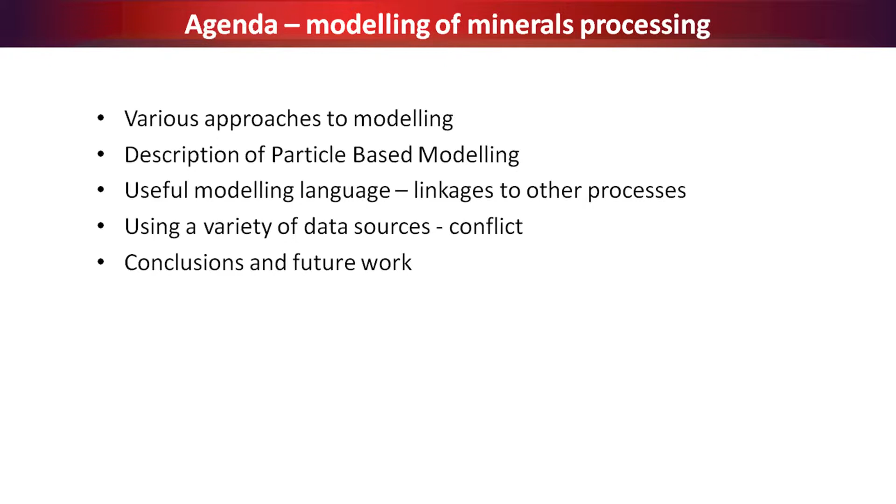People have looked at this from various ways over many years. So I'll start off with what are some of the typical approaches people have used to model fines processes. Then I'm going to introduce particle-based modeling, which is the way I've been looking at it, and show you why it's useful. Then we come to point number 4, conflict. Once you start going down the line of particle-based modeling, you hit all sorts of conflicts, and how do you resolve those?

So two questions: what modeling approach is sensible, what modeling approach should you use, and for today, why do I choose spirals?

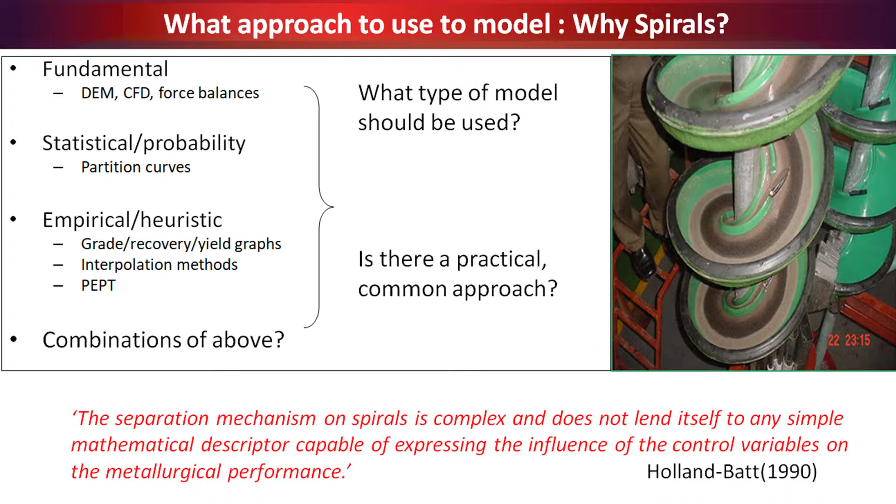Well, the first one is you get things like fundamental modeling. This is when you look at discrete element analysis, or computational fluid dynamics, force balances. Here's a particle, F equals mg, what's the drag force? And you get out to really very detailed fundamentals.

People have tried those types of models a lot. Statistical models, your partition curves. What's the chance that this particle will make it to product? There's that whole probability approach.

Then you get our favorite in minerals processing, the empirical, the heuristic. Measure it, run it, and measure it. You don't try and explain it too much, you just say that's what happened. There it is. And there's a lot of models based on just straight measurement.

So what should we be doing in today's age? Should we use any of those, or combinations of them? That's what I'm going to try and answer.

As to the second question, why spirals? If you look at the quote here, spirals are very easy to run, but incredibly difficult to model. You've got laminar flow, turbulent flow, forwards classification, reverse classification, thin film separation, all in one machine. So it's a good candidate to test a new approach on.

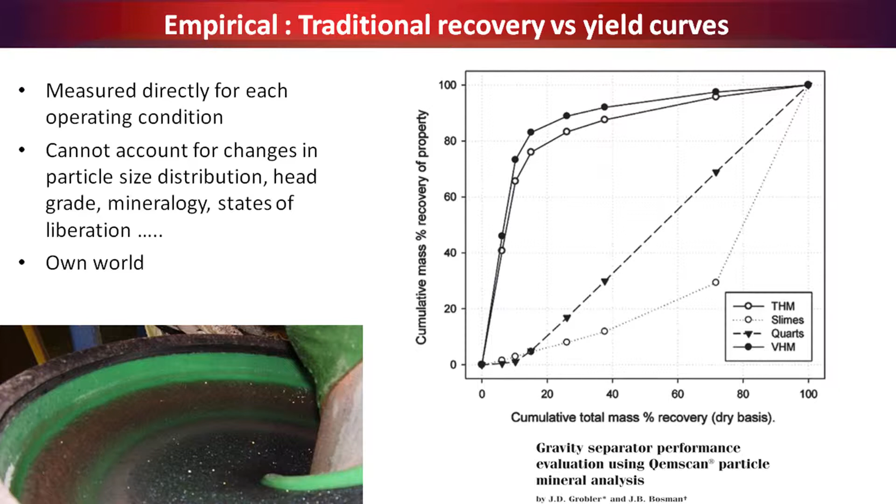So empirically, there's your typical spiral curve. It's mass pull versus recovery for each different type of mineral. The problem is that for every spiral you've got to repeat the test. For every head grade, you've got to repeat the test. If the locking of the feed changed, you've got to repeat the test. If the size changed, you've got to repeat the test. Luckily, the test is quick.

So you can do these tests and have charts for every spiral, showing how it will perform. But if you want to relate this data to a mill, and you ground finer, which chart are you going to use? So it's an approach limited to itself.

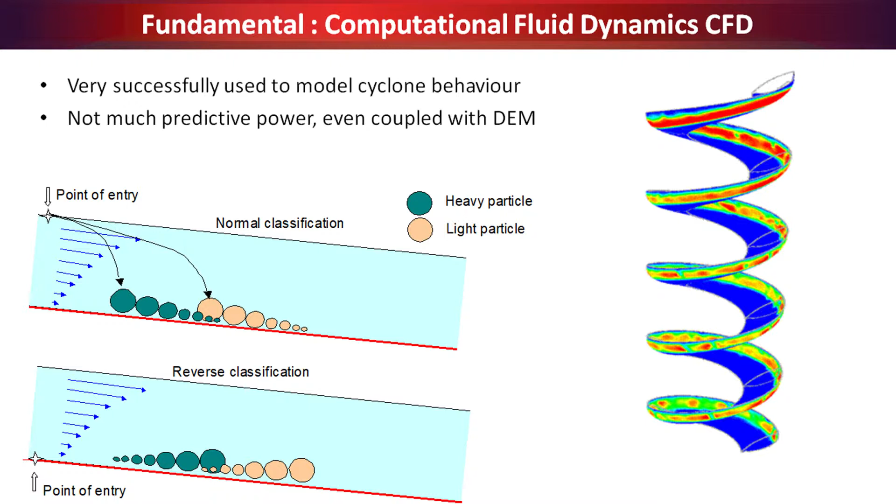Fundamental modeling, computational fluid dynamics, beautiful for a Multotec hydrocyclone. Where's the flow patterns, the high pressure zones, the low pressure zones, the wear zones? On a spiral, not so much. There the guys managed to model where the water goes, but where do the particles go? Not so easy. Even if you couple it with DEM, how predictive are you? Maybe you can explain some things, but can you guarantee that's how it's going to work? Not easy, very complicated.

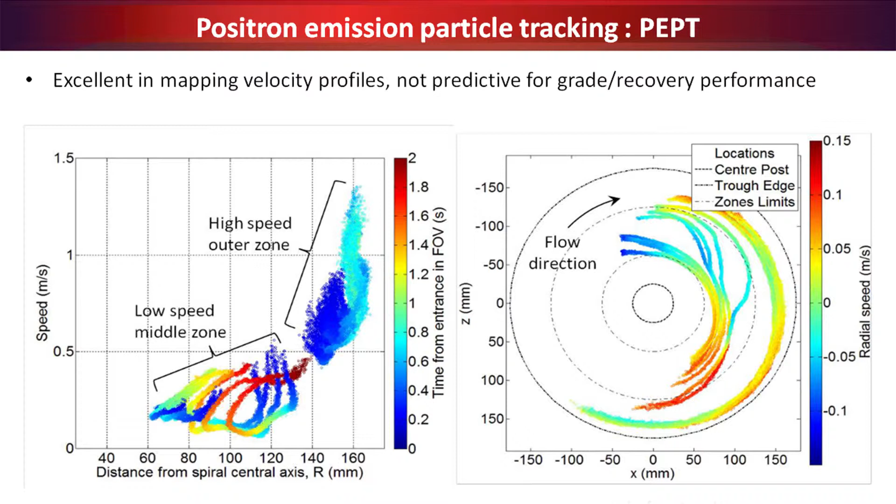Positron emission particle tracking. So what do you do here? You run your spiral and put a radioactive particle in the feed, and you can track where it goes down the spiral. So you can put a heavy particle in, or a light particle in, and see what happened very nicely, picking up subtle effects, but you're not going to have any predictive power.

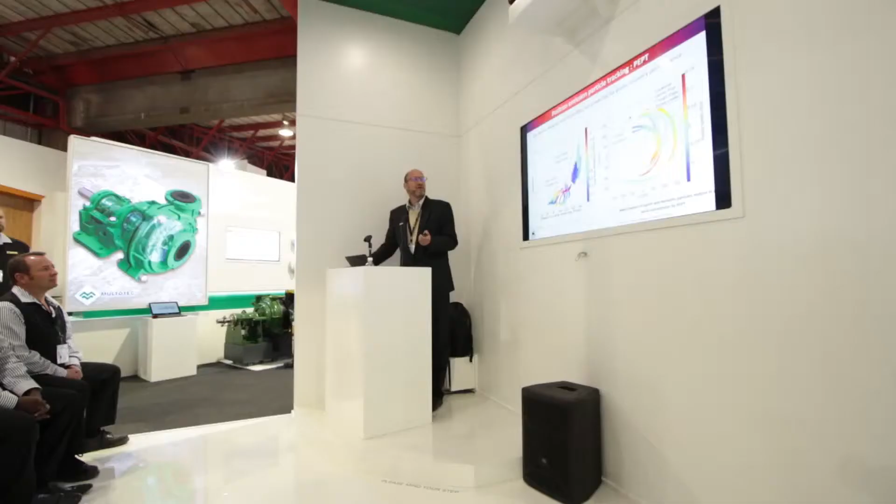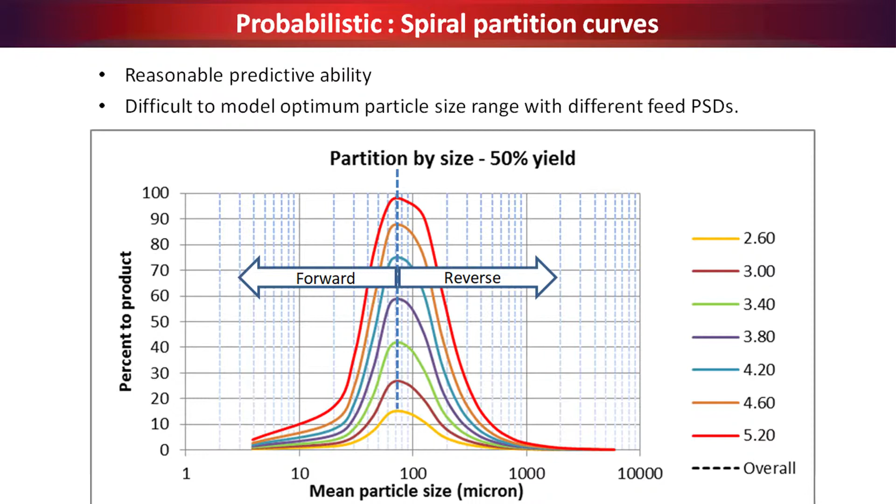And here's the most common one, your probabilistic method. For dense medium cyclones, for reflux classifiers, you've got your partition curves, and you can do every partition curve for every size class. They're quite useful, quite laborious to construct. You need to know the densities of all the particles and the sizes of all the particles. A lot of measurement, but now we're starting to be able to predict what's going to happen.

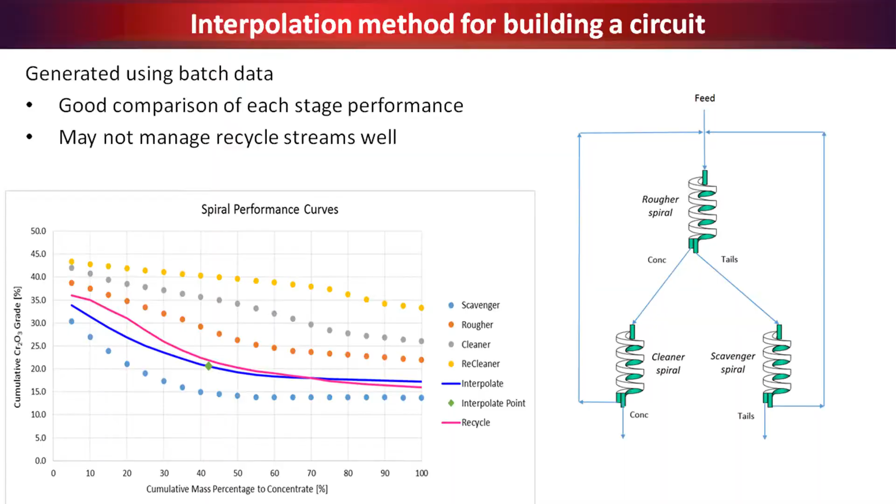Well, that's all very well for one spiral. How about a whole plant full of them and some recycles built in? So for many years, you would use what's called interpolation. Every one of those little dotted lines there is a spiral performance curve, and you might have a feed that lands somewhere in the middle. You can interpolate how well you think it's going to work.

The approach falls down very badly, though, when you put a recycle stream in. You can see the pink line doesn't follow the patterns, it crosses over the other lines. So when you start recycling, you might get the same head grade as the feed from a scavenger concentrate, but it's not going to behave the same. It might have different lockings, different size distributions. So again, you come to an end there.

So now we're going to get philosophical. We're going to say, well, what approach should I use? And this graph sort of shows effort versus reward, or understanding.

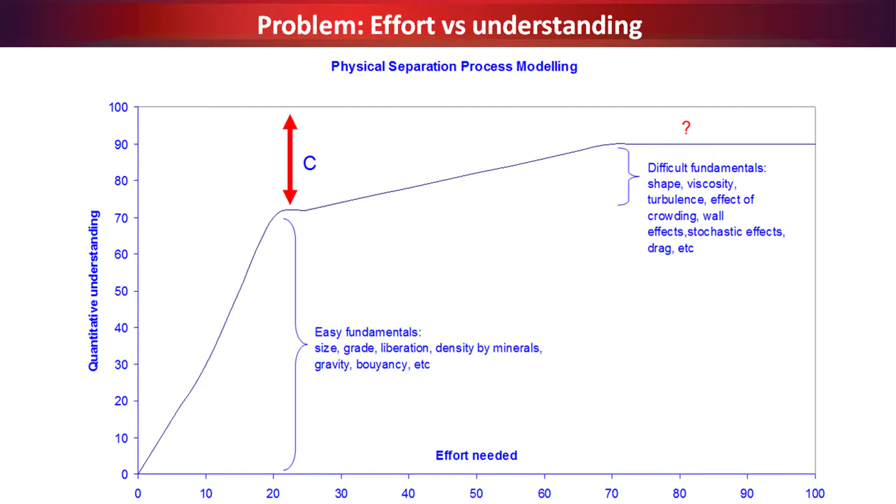For many of these approaches, there's a little bit of effort you can put in. I'll do a size distribution, I can do that easily. I can assay the feed, I can do that easily. So for some information you can get very quickly. But if you want to know what's the viscosity on the third turn of the spiral, 3 centimeters in, how are you ever going to measure that?

What we propose is then to measure those things that are easy to measure, that are fundamental: sizes, assays, locking. Those you can't measure, you measure the effect at the end. What I mean by that is, let me talk about a thing called emergent behavior.

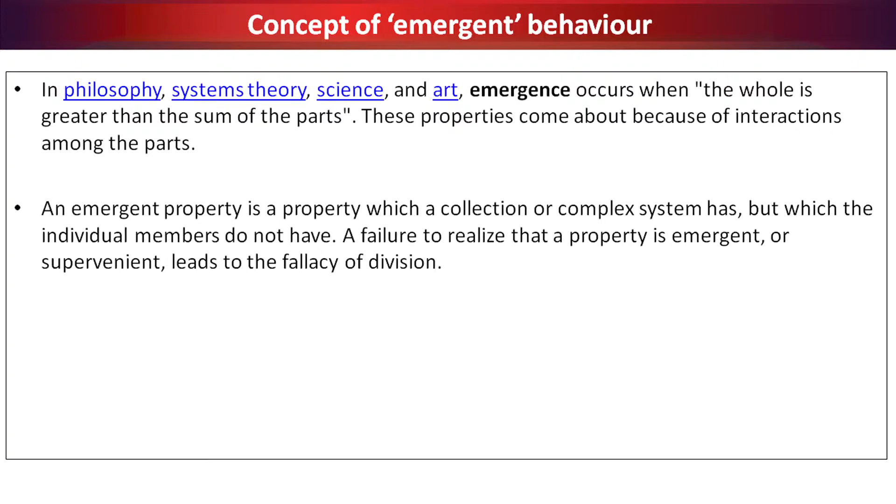I'll go a little bit into what that is. It's a philosophy that says, if I study an individual thing as well as I can, no matter how well I know it, I can't explain a group of them. So an emergent property is a property which a collection or complex system has, but the individual members don't have it. So let's say I've measured my particle size, my particle density. If I put them all together, what's going to happen? The emergent theory says you might as well go measure the overall effect, because you're not going to predict it.

So let's give some examples. In maths, if you know the formula for the circumference of a circle, 2 pi r, I can integrate that to get the area of a circle, pi r squared plus the constant. The constant's zero. There's no emergent theory here. If you know that, you know everything.

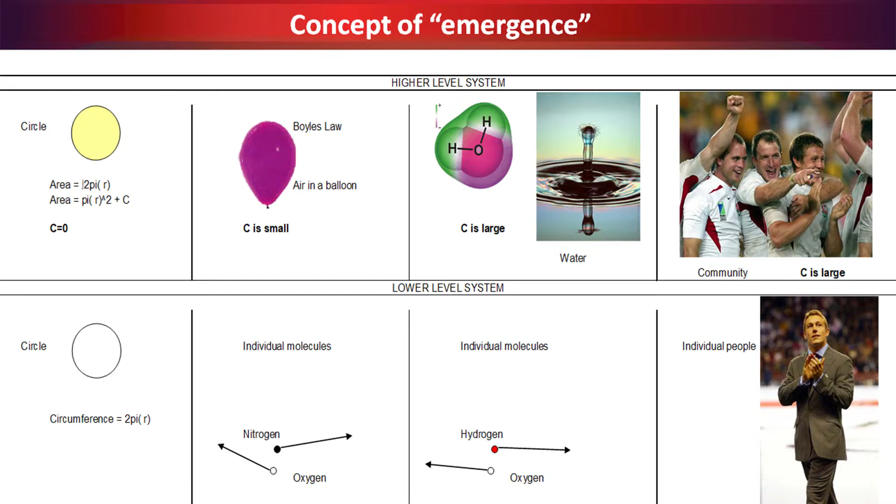If you're looking at movement of gases, nitrogen, oxygen, you know how fast an individual particle is moving, you know how many you've got, you can predict what's happening in the balloon with millions of them. There's a pressure, depending how fast the particles are moving, the balloon expands, it contracts. So there's a little bit of unknown, but if you understand the molecules, you understand the balloon.

Now you mix hydrogen and oxygen together - oops, you get water. Could you have understood that you'd get water by understanding the two gases? There the emergent behavior is very big. If I study the behavior of one person and put them in a crowd, suddenly their behavior starts to change. This is again all the concept of emergent behavior. How hard do I have to study one person to predict what he'll do in a crowd? The effort is huge - rather just measure what he does in a crowd.

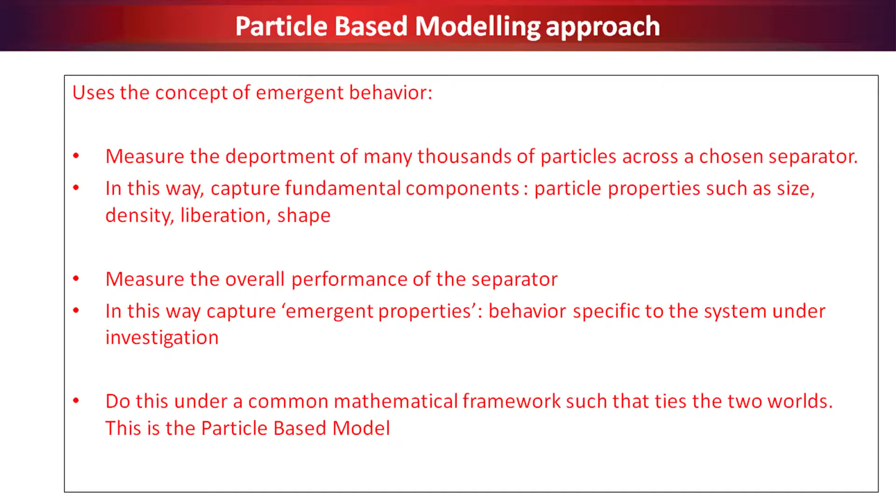So there's two worlds. Now we want to talk about particle-based modeling. We're going to look at two things, using the concept of emergent behavior. First, we're going to use the microscope, or the MLA microprobe, and measure thousands and thousands of particles at the separator feed and product. So there we're gathering fundamental data - every particle's size, density, shape, who it's locked to, etc. We'll also measure the overall performance of the separator, and the model we use must join those two worlds.

So I've got a lot of information to track the performance of that spiral on a fundamental basis. So there you have it.

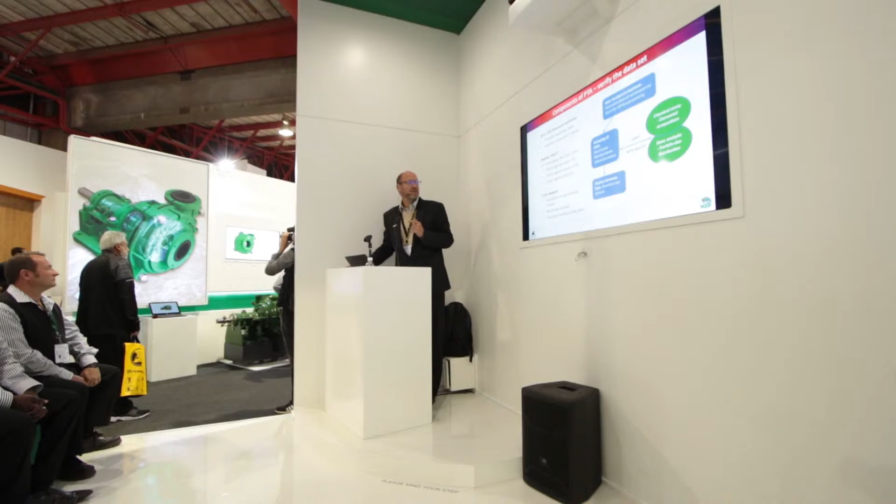You've got to check this against reality. Remember, you're only making a little section - you're looking at 100,000 particles, maybe it weighs 2 grams. How well does my 2 grams represent reality? So you've got to be careful.

Let's do a size analysis with sieves. Does my size analysis agree with my autoSEM analysis, my microscopic analysis? Do the head grades tie up? So there's quite a lot of reality checks you have to do to verify that what you're measuring under the computer makes sense.

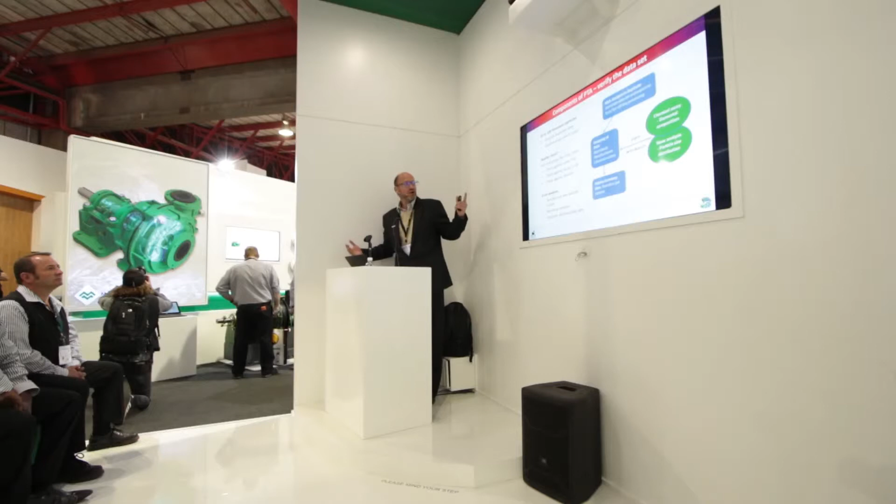What's nice though is you can do error analysis. You can add more particles and say, well, did I get any better, or did I not learn anything new? So you've got a very good statistical handle on how well you're doing by looking at particles.

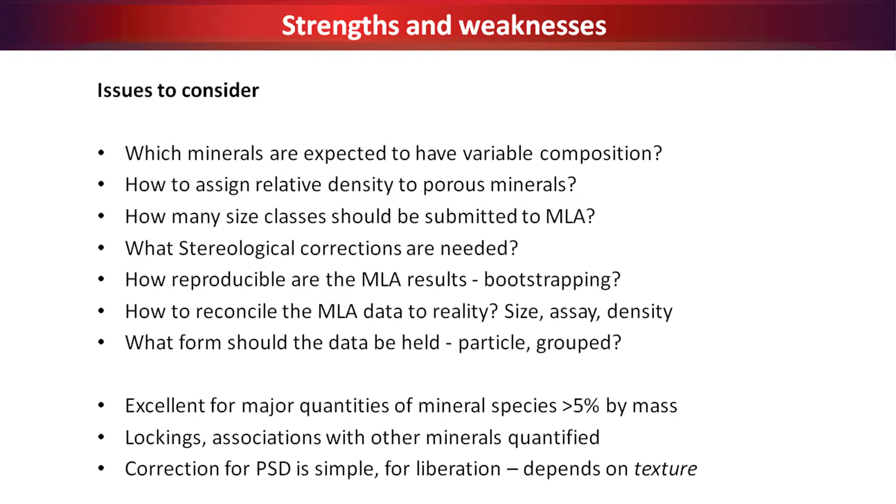I just mentioned many issues. What happens if the particles are porous? What density did you give them? How will I represent triangles versus logs versus squares? Usually they make everything into a nice little circle and give you the circle diameter, but I want to look at shapes. The spodumene petalite separation may be an example that you guys are doing. And how do I handle this data? Do I handle it in Excel? Do I handle it offline? How do I manage 100,000 particles?

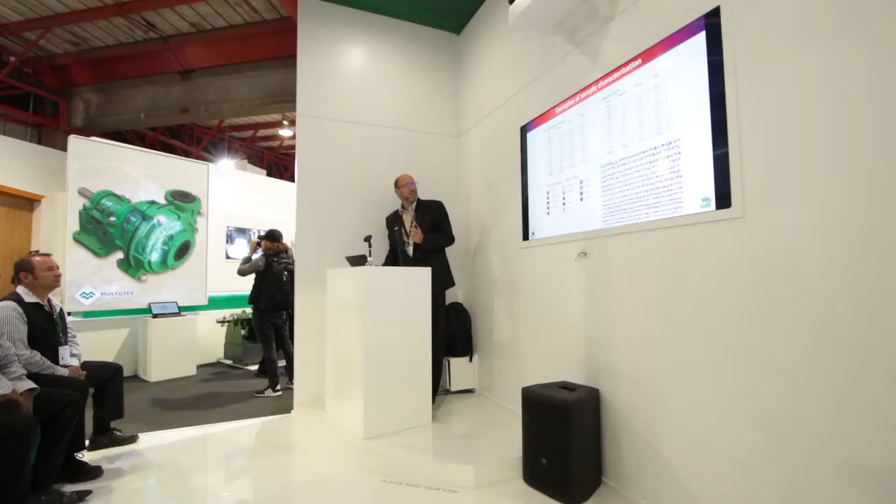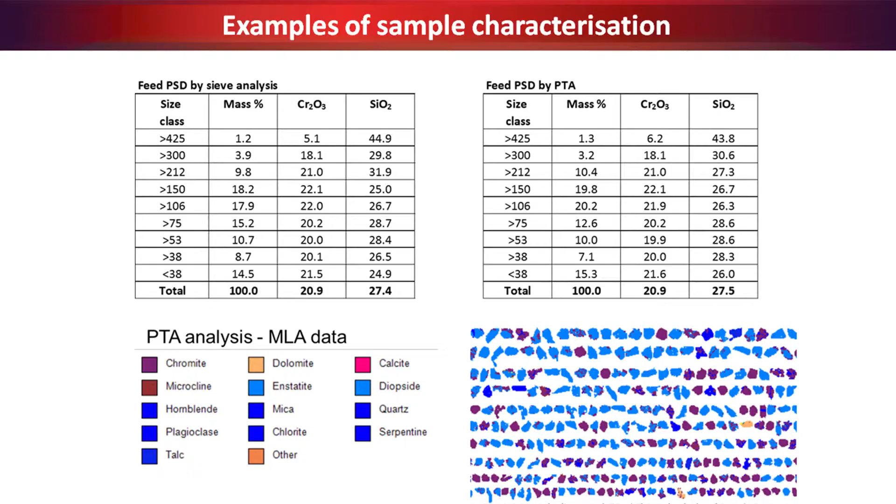So here's some examples. On one graph, you've got a feed size distribution using sieves. On the other, you have a feed size distribution by the MLA, by the computer. With a bit of practice, you can start getting it right. Maybe you've got to do more size classes, you've got to do stereological corrections, but you can get pretty close.

Now, once you've got all the data, you can mathematically sort it. You have 100,000 particles. You can sort the cleanest to the dirtiest, the densest to the lightest, the coarsest to the finest. And you can write down what's possible. Not to say the spiral will get that, but what's available for me. If I had a perfect plant, what can I get? And those are the target graphs that you can draw.

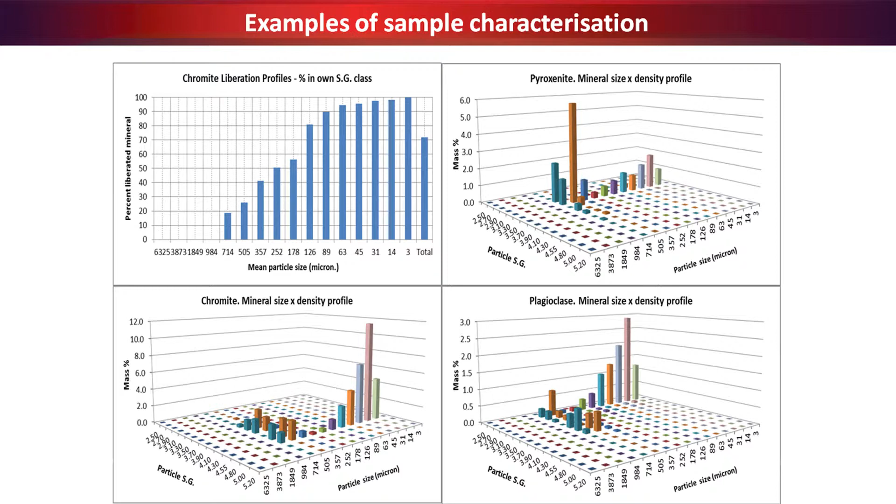You get excellent liberation data. The most powerful thing you get from the MLA is who is locked to who. Is this piece of chromite clean? Is it attached to a pyroxenite, a piece of clay? You get all the associations in detail. Have I milled it correctly to even bother with my spiral? That sort of data. You can zoom into any mineral, any shape, any size, and see what you've got. So it becomes very, very powerful.

The problem now is how powerful is the model that can handle all that data? That also has to improve.

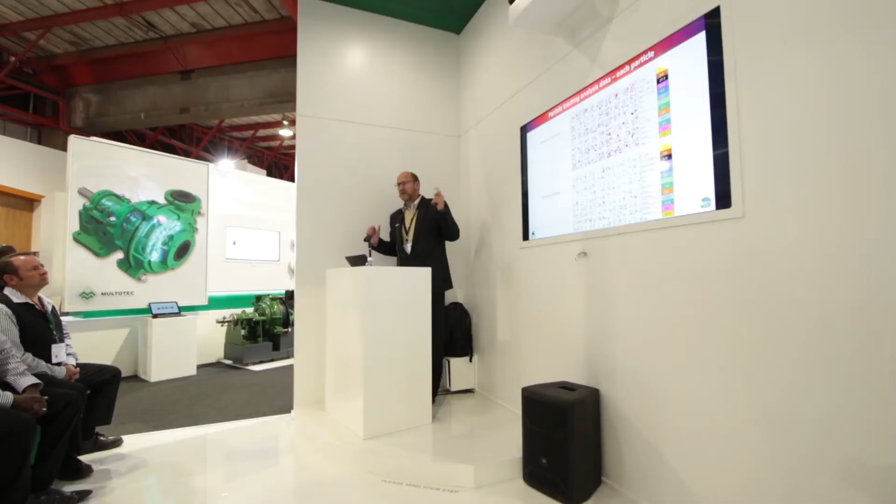Colors is lovely. You can say, I want all my valuable mineral to be pink, please. Let's just track them visually. What happened? Where did the pink particles go? Are they rounded? Are they square? So you get quite a nice feel for how you're doing as well.

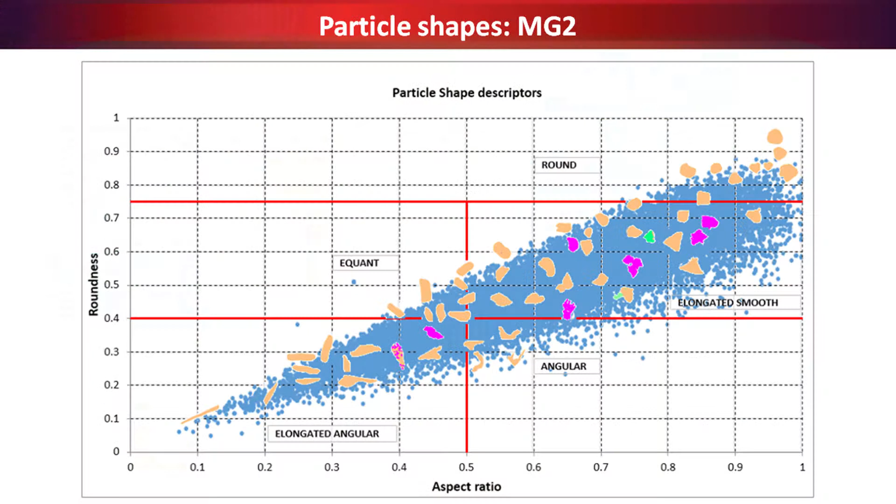Shapes. University of Cape Town has done lovely work on how do you have constant shape factors. Many shape factors apply for a size fraction. So a triangle might have a shape factor of 0.5, only if you're a millimeter. If you're half a millimeter, a triangle is 0.2. Doesn't make sense. How do you have shape factors that you can use that make a triangle the same number at any size? And these are the kind of things you can look at: aspect ratio versus roundness. And you can start seeing what shapes went where.

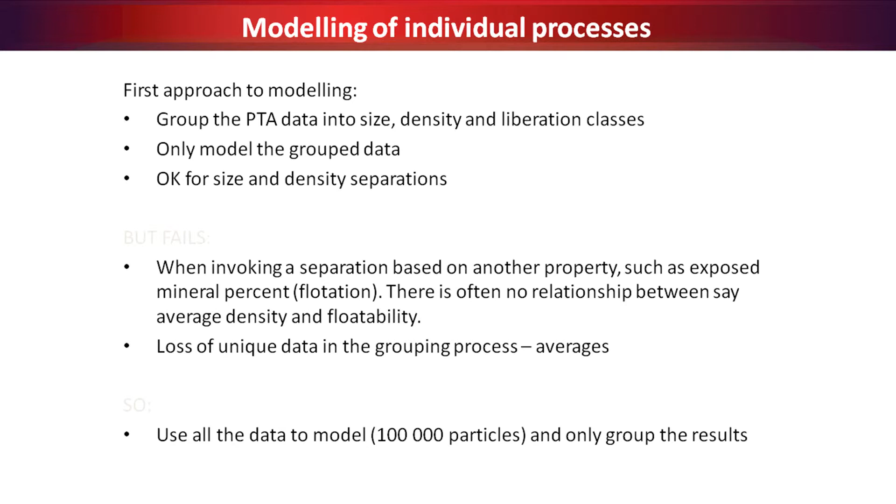When this process began, we said, sorry Excel, you can't handle 100,000 particles. It's too complex, too slow. Let's summarize everything into size classes, into density classes, into liberation classes. And that all works well for a simple separator. But now you want to do flotation. Now you need surface properties. But if you summarize it by size or by density, where's your surface property?

You've lost them. So we abandoned the approach of grouping things into size classes and density classes to keep every particle's information untouched. And the only time you ever summarize is at the very end when you want to look at the overall graph, what did I do? So your summaries, your outputs, are in summarized form, but you leave all the particles alone.

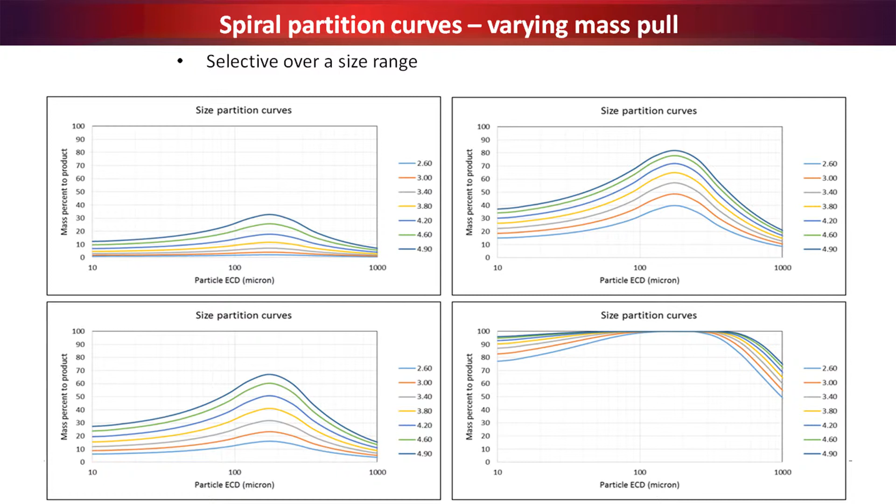And you can see a spiral performs very nicely across a narrow band where all the curves lift up nicely. A different spiral may have different shapes. A spiral under a viscous medium and a spiral under nice clean water also may have different shapes. The particle data never changed, but the emergent behavior certainly did. And so how can you tie those two again through your model?

I think I've said some of this already. What we do though is we link Excel to Python. We keep all the particle data offline, because it's very slow, and you say to Excel, a little routine, Python, go and call those particles, bring back for me the triangular ones, put them back into Excel. It makes things very much faster, and the learning process is very quick because you're not learning a new package. It's still all interfaced through Excel.

We've got quite far. Spirals, reflux classifiers, hydrocyclone screens, flotation, very, very interesting because you've got surface properties and bulk properties. So what does liberation start to mean? It changes its name. So we've gone quite far down the line with various types of separators.

So that's all very well for -1 millimeters, but now what about plus a mil? What about going coarser? Can I use this approach to look at rocks? I can't put rocks under a microscope, but can I still classify them in the same way? Can I classify them by size, by shape, by what they lock to? And you find that you can.

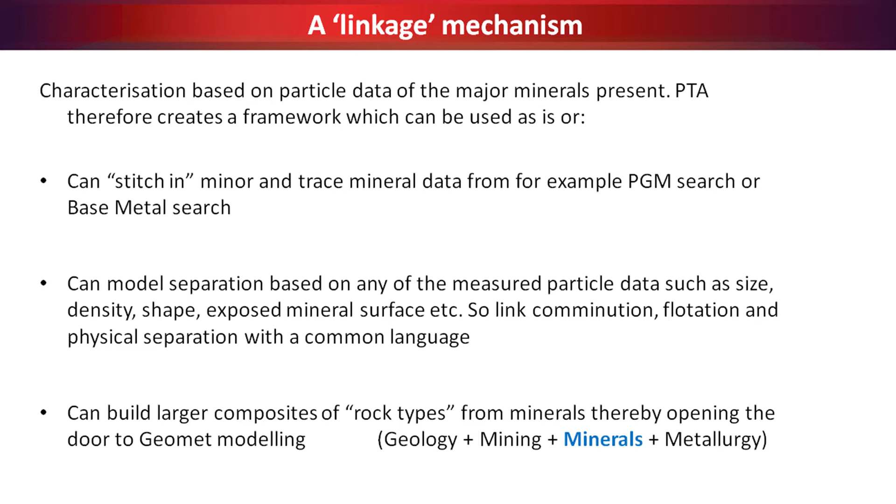You can also go tiny. You can say, let's look at PGMs, 5 grams per ton, very, very low amounts of mineral to look at. And they're tiny, 2-3 microns big. Can I stitch them onto the minerals they're locked to? Can I group these minerals and make rocks?

So once you start from particles, you can go smaller and bigger. You can link different worlds through particles and minerals rather than through assays. Very useful in the geometallurgical approach where you're looking at variability. It's very quick to say, I will now build a new particle data set with a higher head grade or a different composition. How does the model apply to that?

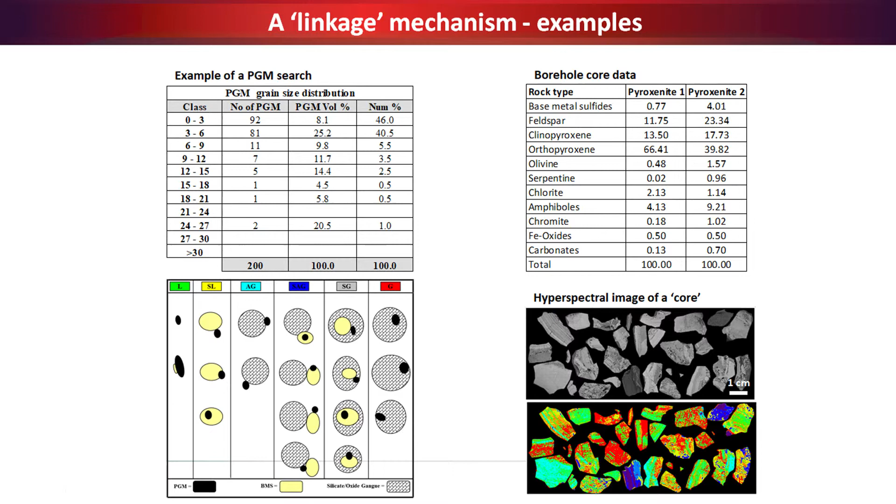On the left-hand side, you have some PGM data from a typical PGM search. Yes, you can tie it in. On the right-hand side, hyperspectral images give you the locking data of nice big pieces of core, and you can relate that also back to your minerals. So you can go much coarser and look at crushers and mills using the same approach.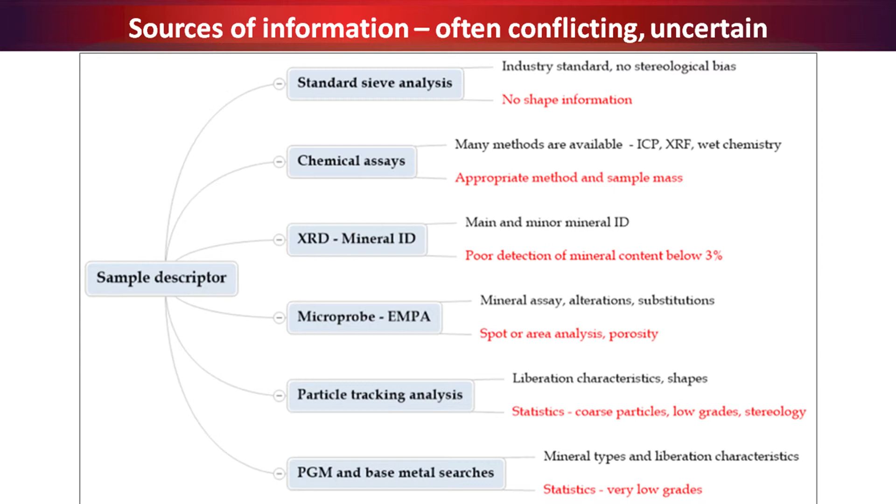And then everything fell down, because now you have conflicting data. You have a size distribution giving you a sieve analysis, but I got a size distribution from the computer. I've got chemical assays that I measured in the lab, but I got a reconstituted mineralogical chemical assay. They don't agree. I've got XRD data, I've got microprobe data, I've got all kinds of data. How do I reconcile this so that I can believe it with one set of data, not changing all the time? And what it means is you start having to build your own particle lists.

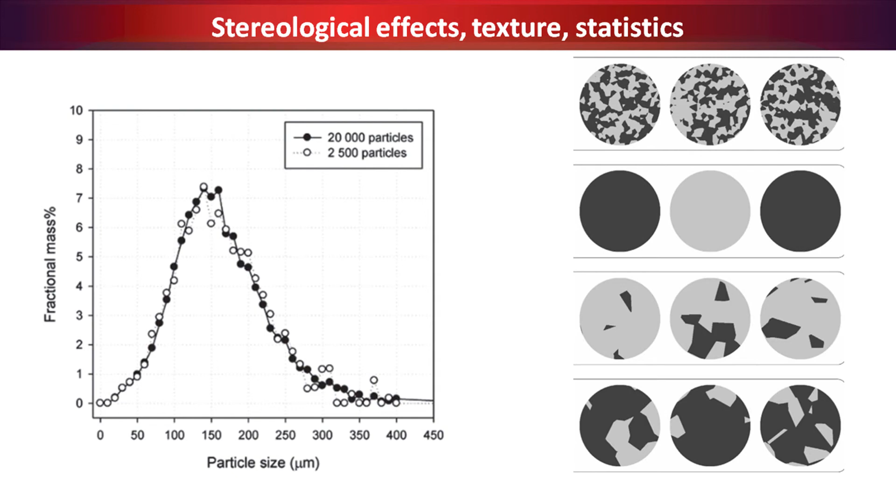Stats comes in, texture comes in. Looking at 2D sections doesn't give you the correct information for liberation. It gives you a partial view because you've cut through the stone. You haven't got the complete liberation aspects of that stone, things like roughnesses. So there are shortcomings that you've got to watch out for, that you've got to correct for.

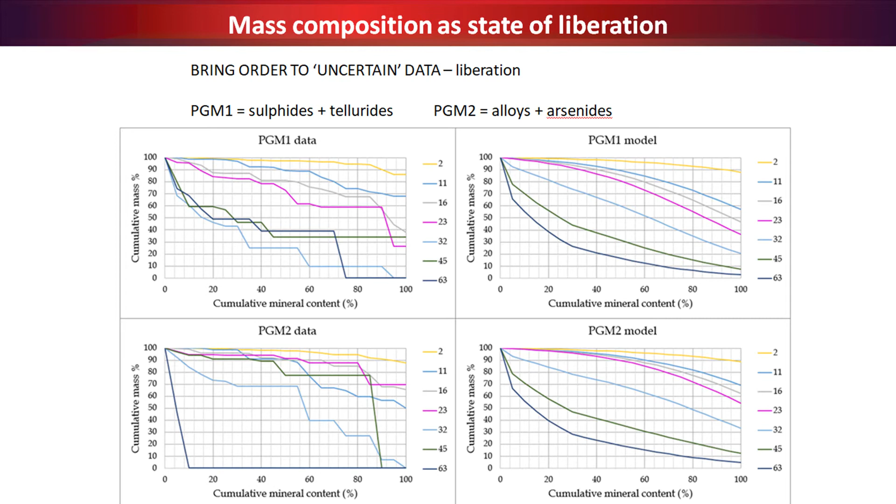Here's an example. The data on both left-hand sides are data directly measured looking at the platinum group minerals at different size classes. But they're all wobbly graphs and chunky sort of lines. Does it really exist in nature in a chunky form like that? No, it's because there's so little data that if you measured more and more, it would smooth out. Well, let's use smooth data then and fill up the holes.

Okay, so I'm getting a bit philosophical again, but you can build the data better than a partial view gives you. Once you start doing that, you have a very powerful weapon in your hand. You can correct for missing data that you didn't get.

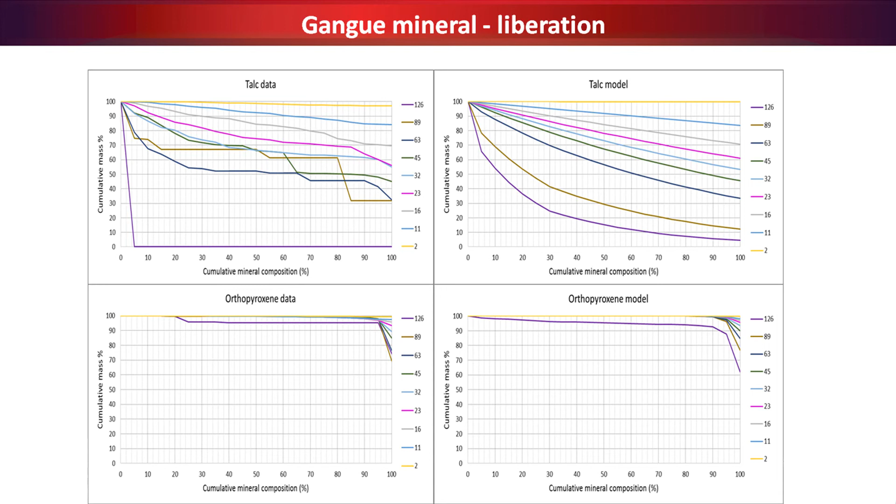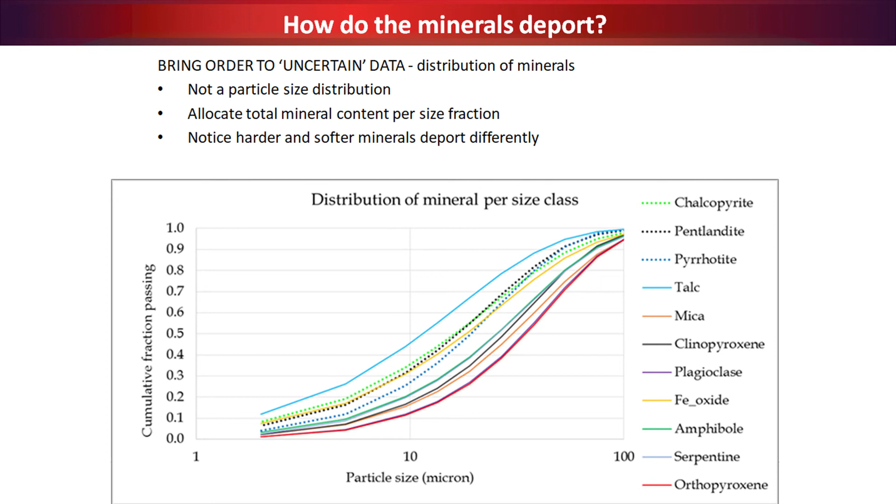All of this then puts together, and it builds you a coherent data set where every mineral has its own inherent size distribution, how it's locked, how it occurs. On this graph, you can see the talc, the blue line, is finer than the other minerals because it's softer. So yes, you confirm this mill broke the talc finer, the orthopyroxene's the hardest, it stayed coarser. If I milled it differently, what would happen? You get a very high degree of resolution on your data.

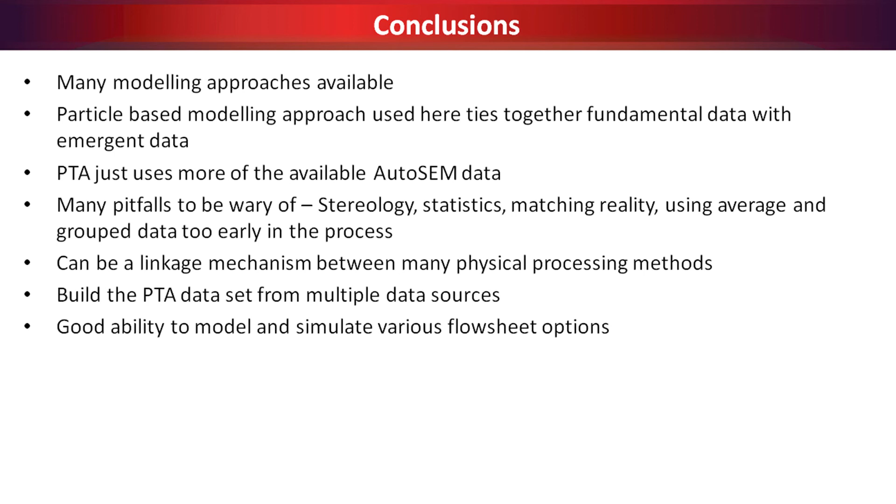Okay, so that was quite heavy. But what I really wanted to get to was many approaches are available. This approach has two legs, fundamental and emergent behavior, but bring data in from all over the place. Don't just believe what the microscope tells you. And there are many pitfalls, still a learning process.

But we are now putting flow sheets together, going to audit a real plant, comparing that data to what a batch piece of data did, what happened, what emergent data showed up. The batch is the same, the particles are the same, so the changes have happened because of emergent effects.

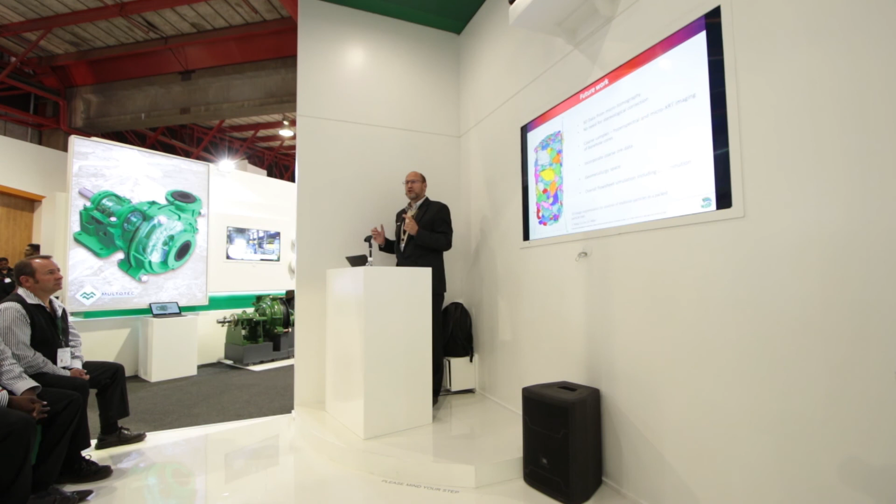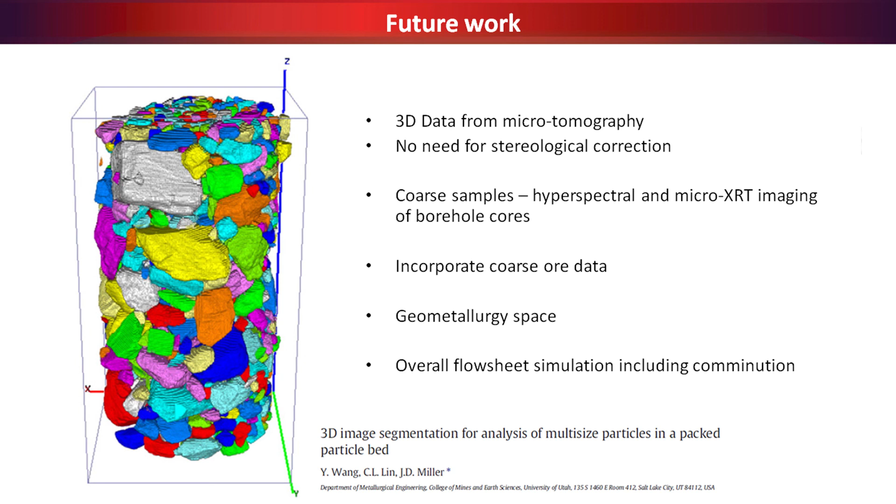Now, what about the future? Microtomography, where you take 3D data directly into the model. You don't have to try and build particles, you can get them straight away from X-ray tomography. It can't do it yet, it's still on the journey. It hasn't got enough resolution, but maybe that space will be able to bring 3D data straight into the models rather than only 2D data.

That was it. Thank you. I hope you had a flavor of what we're doing.